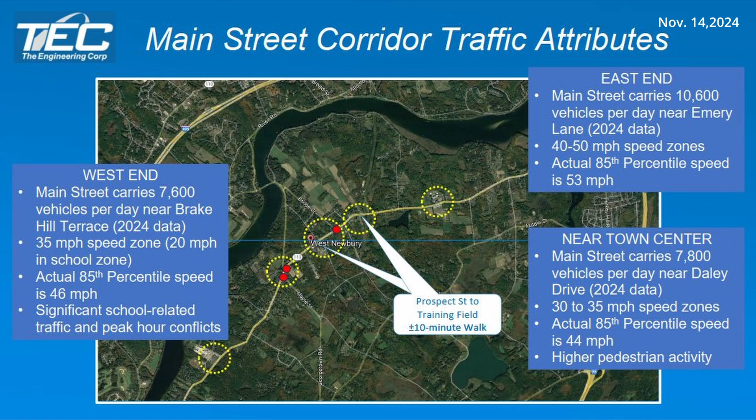So, of course, I have been working on this project, but I don't live here, and I don't see it every single day like you guys do. So we would love to hear some input from you guys on things like pedestrian connections and crossings—where sidewalks are potentially missing that you would like to see a sidewalk.

Is there a location that needs a crossing or needs crossing upgrades? Things like accessibility—is there anywhere something may be out of compliance, like a pedestrian curb ramp? Bicycle accommodations, traffic calming measures in areas of high speed—is there anything that can be done to reduce those speeds? Targeted intersection improvements, targeted roadway safety measures like guardrails, roadway lighting, pavement quality.

All of these things can be considered, but of course, a ton of other things too. If you have ideas, please share them with us—we'd love to hear it. As Kevin mentioned, we do have sticky notes for you to leave a comment, but also come and talk to any one of us, or send an email. If you have an idea, we want to hear it. So I would like to turn it back to Kevin now.

Thanks, Rebecca. So as we looked at some different focus areas, as we've worked with town staff and heard from you at the meeting last November, we zeroed in on at least the initial framework for half a dozen different focus areas. The first is where we are at Pentucket Middle and High School, this area of the school zone on the westerly end of town. The second area is in the area of town center, Maple Street.

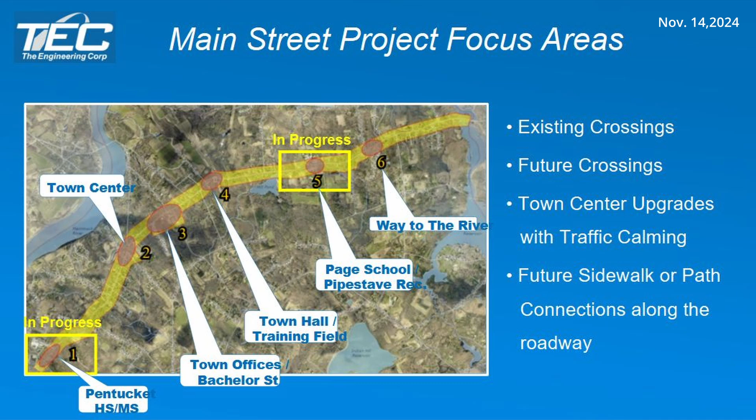Two of these are in progress, at a higher state of concept development. In the case of the Page School, many of you were likely at the special town meeting, but the town approved construction funds, and I'll show you a graphic of that as well, to implement improvements, and we're in the final stages of review with DOT.

This is hot off the press, so we called it draft in the works. We have a parallel contract with the town to look at targeted improvements right outside the doors here, focused on pedestrian safety. We've been out here to observe school-related traffic and certain things shown on the concept. Some of the words may be difficult to see, but I'll point out some relevant features.

On the left, looking at new sidewalk connections to cross the school driveway itself, a new sidewalk along the school frontage in front of the fields, and a brand new crossing in the area of the pizza shop, Nick's Place, to cross pedestrians in that area, knowing it's obviously a good destination for those that are hungry.

One of the other things that drives the location of certain features is the fact that just recently, the Merrimack Valley Transit Authority, or MEVA, introduced bus service here in West Newbury. It's a wonderful thing, so there's an option for transportation outside of the typical car. So there are now stops, and we look to make those stops more robust and accommodating for different platform areas, so it's more obvious where the stops will be.

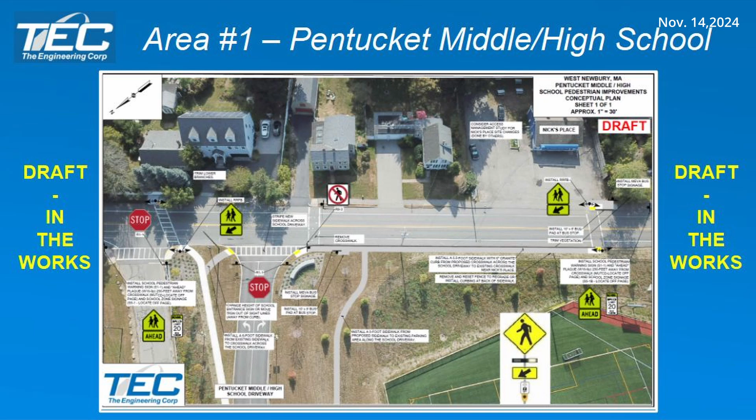So on the right side of this slide is a better photo of what that RRFB, rectangular rapid flash beacon, is. This is actually from Newburyport, from Low Street. It's widely used. It can be solar powered, or hardwired if there's a nearby utility pole.

They're a reliable source of enhancing the visibility of pedestrians in the crosswalk area. In the area of town center, some of the graphics you'll see on the flipboards, and up here as well, there's a key up top. The orange are existing crossings that exist today that could be enhanced or upgraded. The light blue one might be a new crossing someday, depending on if there's any housing proposals in that area. Anytime you have different new developments or residents in the area, that might change the origins and destinations for where people want to cross.

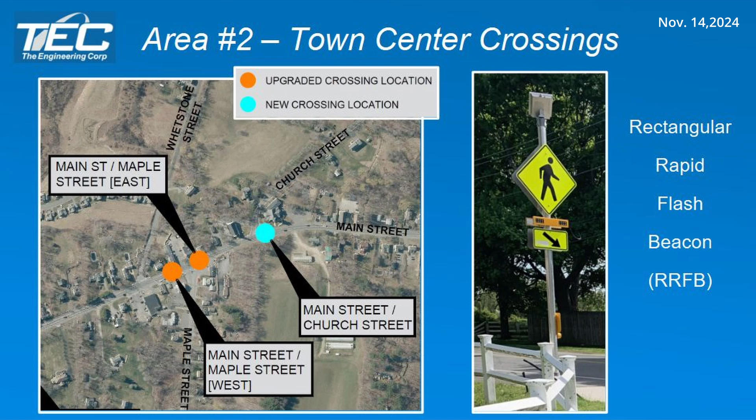Within town center itself, these are just a few initial ideas that could be considered. As I mentioned earlier, the town received an earmark to move forward with some other more detailed planning, to advance the discussions focused in this area.

They could include things like trying to reorganize some curb cuts, so the broader areas that are wide open and a wide expanse of pavement that's not necessarily inviting to walk across. Is there a way to better define that? Could it possibly even open up more parking off the road, or provide opportunities to work with the town for leased parking so there's parking opportunities for all the different areas in town center?

Are there opportunities to consider different types of newer traffic control? The pedestrian signal that's there is almost always green unless somebody pushes the button. Up in the upper right is more of the newer technology used, that remains dark except when it's pushed. These are very common in moderately used pedestrian areas. They're called HAWK signals, or pedestrian hybrid beacons. Same idea as the flashing warning assemblies, but more enhanced and more control.

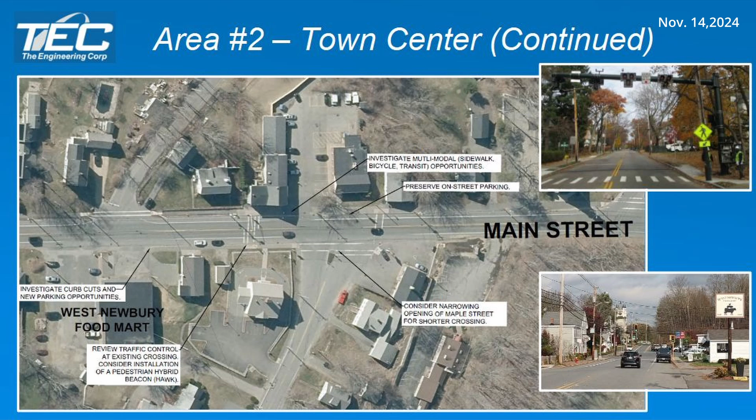We also know that in this area where there's a number of businesses, it's important to retain as much parking as we can, but also keep our eyes open to whether there's an area where there can be agreements and relationships between property owners and the town to look at common parking areas, while we look at other enhancements within the street.

As we move further east to focus area 3, this is in the area of the town offices and Bachelor Street. We have 4 existing crossings that exist today. This is an area where I know there's been some heightened needs and concerns, but there's also great opportunities along Main Street, and for things that might connect to Main Street in the future.

When we look at the same type of device that could enhance certain crossings, we may find that the 2 right in front of town offices in the middle could be consolidated into one, joined with other sidewalk improvements on the south side, or the bottom part of the road, right in front of the town offices, where today it's discontinuous. There are also challenges with accessibility, where those with accessibility needs can't really get from Main Street up into the town property directly.

So there's opportunities there for a number of different needs, but it also might involve different ideas for consolidating, for the purpose of enhancing or drawing attention to it. There's other opportunities too with...

Not just what might involve Main Street itself, but other potential grant programs. There are a number of things out there where it might not need municipal town meeting funds, and the town's been very good at submitting grant applications. There's a number of other programs out there that might also provide the ability for other connections, like Bachelor Street, to connect from Main down to the fields. That's maybe not the focus of what we're talking about tonight, but there could be other opportunities that can be linked together to really get people where they want to be.

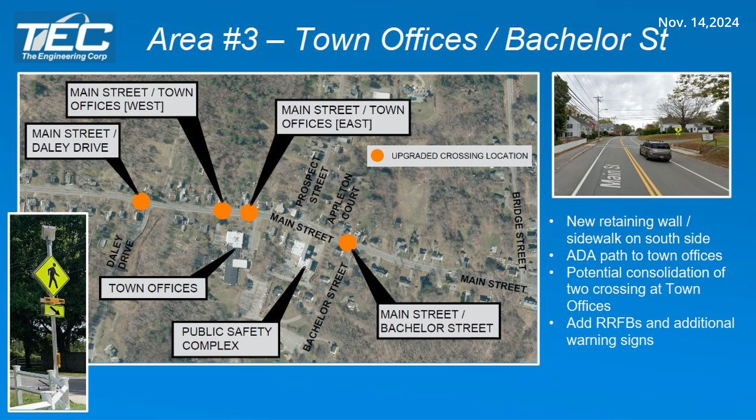As we move further east to focus area number 4, in the area of training field and town hall, there's a great opportunity here. Has anybody used the crosswalk right in front of training field, crossing to town hall? Okay, raise your hand if you feel really comfortable crossing at that location. Anybody? That's awful.

So this is actually what you see—oops, different photo, it's out of order. The crossing itself is on a curve. There's the flashing warning symbol there, but it has sightline challenges. As we look at opportunities here, we might have the opportunity to move that further west to a better vantage point where it's safer for those crossing. It's on a straighter section of roadway.

It happens to be right in front of the library, but it also provides an opportunity for other placemaking opportunities directly in front of Town Hall, since anybody parked right in front trying to back out onto Main Street finds that very challenging and unsafe too.

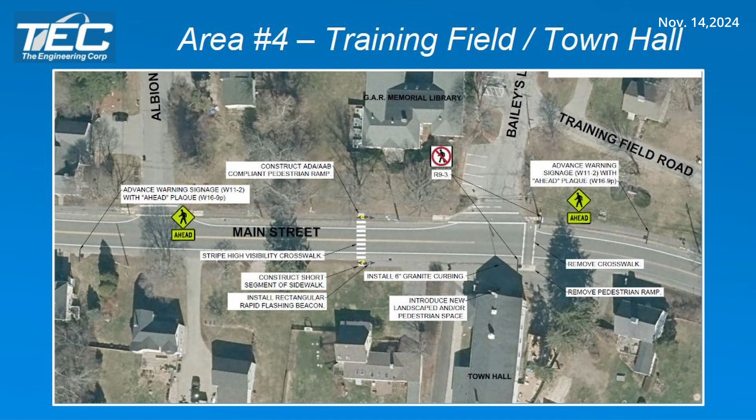So there might be opportunities there for green space improvements, placemaking improvements where it's a place for people to gather, where now that crosswalk is kind of in the middle of a sea of pavement. On the right, you can see that the cement concrete pad that alerts those with visual impairments to cross the road is within the area of the parking lot itself.

As we move further east to focus area number 5, this is the Page School and Pipestave recreational area. This is the area, as we mentioned earlier, that is at a higher state of design. We are in what we call the 75/100% design submittal that just went in earlier this week to DOT for the final major review, in hopes that they release a permit for the town to do the work here, work that's been funded by a special town meeting.

We're looking forward to having these improvements in place, but this is one where, as we listened to the needs of the community, it wasn't just about pedestrians crossing, but also the equestrian users. So in this area—if you can see the red dot, everybody see it okay?—we have new sections of sidewalk shown in yellow, and a new highly visible crosswalk that's at a defined location.

Right now it kind of goes diagonally in the middle of the two driveways, so we're moving it outside of the driveway to an area that now has curbed sidewalk going up to the Page School property. Next to the sidewalks on the south side, coming off Pipestave, we're actually proposing a gravel area that can be used by those on horse, with a separate crosswalk next to it. Rebecca's a rider as well, and I think your quote was, 'I don't think my horse would ever cross the ones with the lines going across.' So we have a different style crosswalk here that goes to another gravel area for those using the expansive network of equestrian trails behind the Page School.

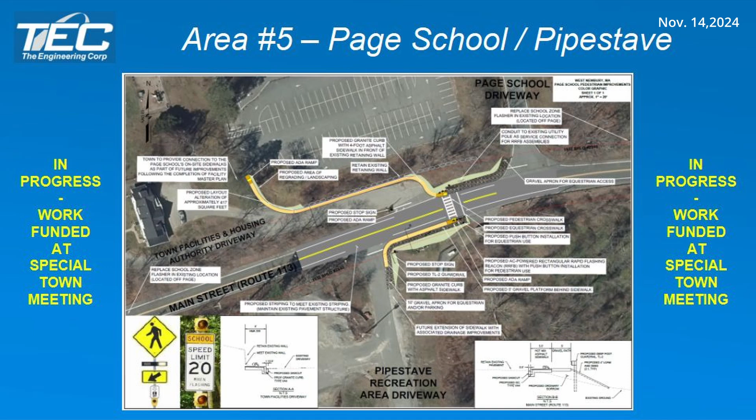Again, this is in the works, it's been funded, and we're on our way.

As we move further east, although this was the last formally identified focus area, it doesn't mean it's the only focus area that remains. But looking at Ocean Meadow, that trail crossing, there's a lot of history at this location, dealing with easements through other properties, where the trail should come out. The Ocean Meadow development is down here in the lower right. Different opportunities for trails, but where to cross becomes the question. There's different ideas that have been formulated to date.

Could it be something where it goes further to the east? That location is shown as more or less at the crest of the hill. If you're familiar with the area, just east of the Way to the River, there's that hump in the road, and it's kind of tough to see over it, but if you can have the pedestrian crossing at the peak of the crest, that would maximize the visibility.

But there's also an opportunity where if you went a little further to the east, there's actually an existing driveway curb cut that used to be there from years ago to get to Main Street through existing fields. It's not easy - there's a lot of process involved with changing where these things could be, but our goal is to look at a crossing area that's safe and functional and usable for a myriad of different users. So although there's no design yet, we don't know which side of the road it would go down, but having a sidewalk and/or gravel path down one side of the road with a well-defined crossing so they can get to the Way to the River and head up towards the Merrimack.

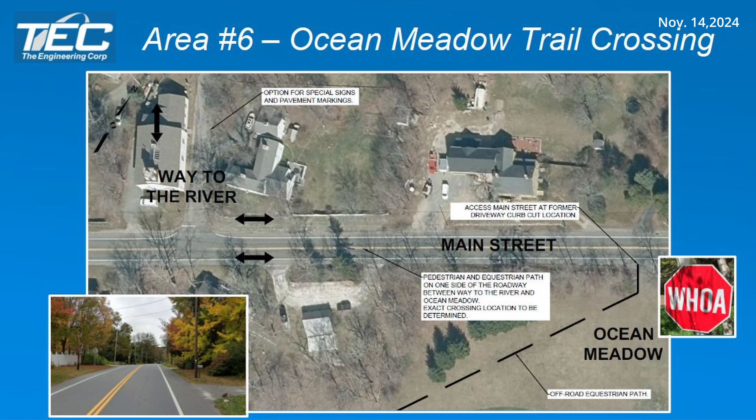Beyond those focus areas of the crossings, we also want to talk about what might be future connections that are more linear along Main Street that the town may want to consider as other successive projects - ones that may be longer term in nature, but ones that also provide opportunity. Main Street today, throughout much of its 5 miles, has pretty wide shoulders. That area on the side of the road where it's outside the double yellow and the white line - they're pretty wide shoulders there today.

Sidewalk on one side, you've got utility poles mostly on one side, and then they might crisscross. But the idea being that when you look at future projects, we're going to have to consider different things like state policies, like MassDOT's Complete Streets policies. At their fundamental nature, they want to be able to accommodate all types of users in as robust a manner as they can. But MassDOT also knows that each project is unique in and of itself - this could be a short stretch or a longer stretch of roadway that's considered.

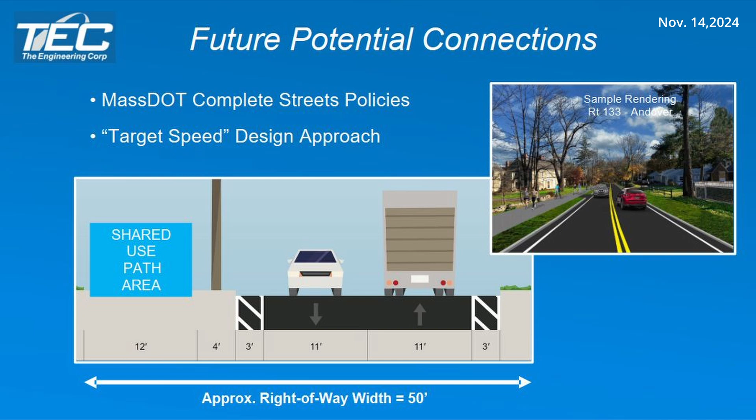You might find that, as we received some comments last November and since, there are different areas where people were saying, I'd really like a sidewalk connection, or I'd really like to be able to walk my child to the Page School, or walk to the ball fields. We show different areas as just one idea on the east end of town, where you might go from the town offices on Bachelor Street and the fields that are here, and have something like a shared use path or a sidewalk, or some other facility that can then go to training field. But then you could extend that project and go from training field down to the Pipestave area. Maybe there's an off-road path that can get up to the school property.

Beyond that, there's obviously some very steep slopes and other things that are more challenging, but the point is you can always start with some portion of a project and continue it from there. Typically, we recommend starting in your area of greatest density or activity, like a town center, and continuing it in the future.

These are just ideas. We would love to hear more from you or answer questions about some of the ideas that we've started to consolidate, but this is not the end of the process or the discussion with the community. As I showed in that process diagram, we're right up at the beginning, but this is really the foundation of what you see as the gaps in infrastructure or the safety needs that can inform those future projects.

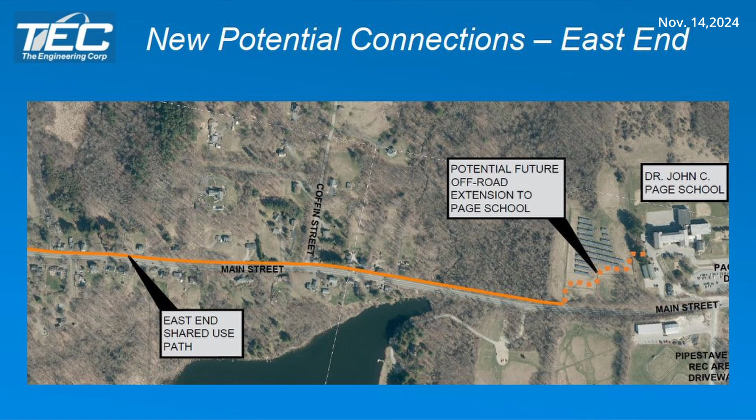So as far as our next steps, there's an opportunity where we can split into smaller groups, grab the different exhibits, talk in more detail, but then we'd like to come back and understand some of those general themes. Following tonight, we review what we heard and what's written as comments, or what may come via email, to see if it refines any of those focus areas or thoughts about project need. Ultimately, we'll assist the town in preparing an application, possibly other successive applications to establish different projects that can be done over time. That's a process in itself, but it really gets shaped by what you might discuss with us this evening.

So really, that's how you can help. You can help us understand how you use the road, what you see as needs, what you'd like to see for future projects, but continue to be involved, because this is what makes community. So thank you.

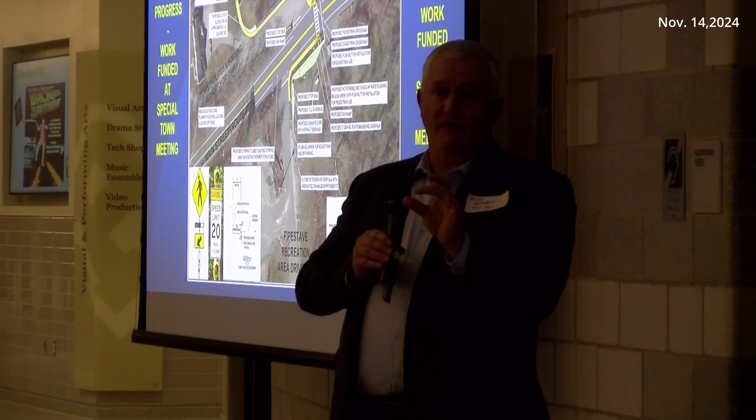So the question was, with the final design stages at Page School for the crossing improvement, could that have a traffic calming effect, or could that be continued further up or down Main Street? Where that's very finite in its crossing, we're not really changing the width of the road, we're not narrowing it, we're just defining the edge better. It's not necessarily going to calm traffic, but it's going to alert traffic to the presence of pedestrians or equestrian riders. If there was a theme of improvements that was longer in nature, that would be more likely something that would change speed attributes. But just the crossing itself is going to make it safer, more identifiable, but it's not necessarily going to calm speeds when there's no other activity. It's just a very defined crossing location.

I think Camille was asking about enforcement, not about design. So that's a question for the town, about just enforcing speed limits on Main Street.

Did you guys consider those signs that tell you how fast you're going and remind you to slow down? Sometimes, because when I see those, if I'm going too fast, I always slow down. So was that considered as part of the thing?

We call those driver speed feedback signs. Yeah, those are absolutely an option that could be readily implemented.

That's something that when we look at different crossing locations, there's low-hanging fruit along the corridor. That would be another opportunity for low-hanging fruit that doesn't cost a whole lot to do, that the state could potentially consider in multiple locations, because if you just have one, people might slow down and then ramp up again. But if there's a theme of them along the corridor, it's more of a consistent alerting, because sometimes it's just comfortable to drive fast with wider shoulders, and people don't realize how fast they're going when they're following the car in front of them, probably too closely.